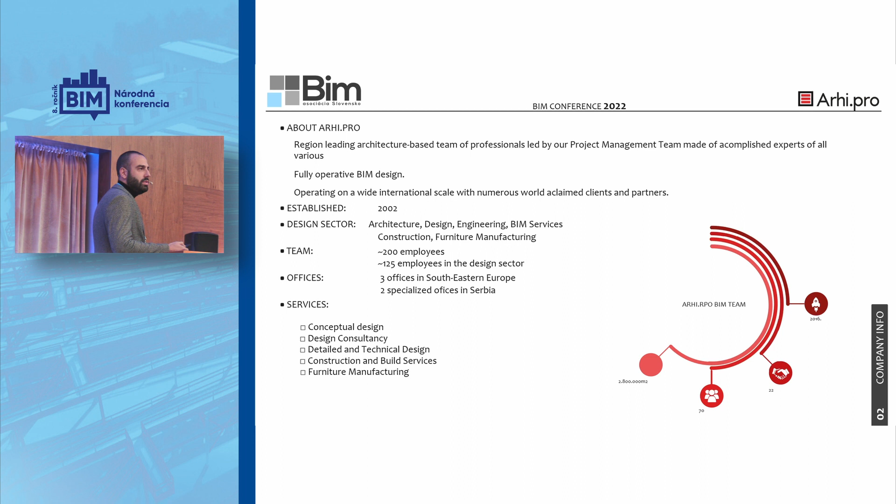Our BIM story started in 2016 when the first words of our standard were written. What you can see on the screen is the content of our BIM standard, updated this year.

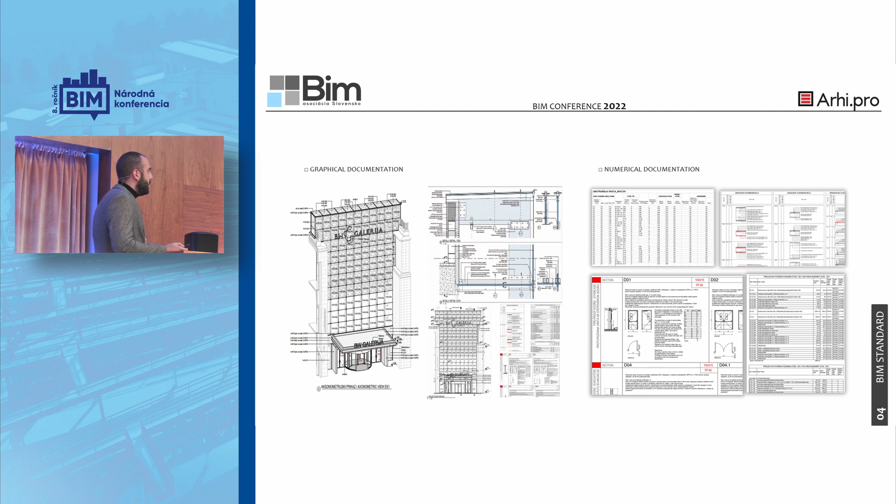In our standard we defined everything such as graphical documentation, numerical documentation, roles and responsibilities, naming conventions, BIM execution plan templates, and checklists from BIM models. So all elements such as view templates or door schemes, architectural physics are standardized, and there is no space for any kind of improvisation.

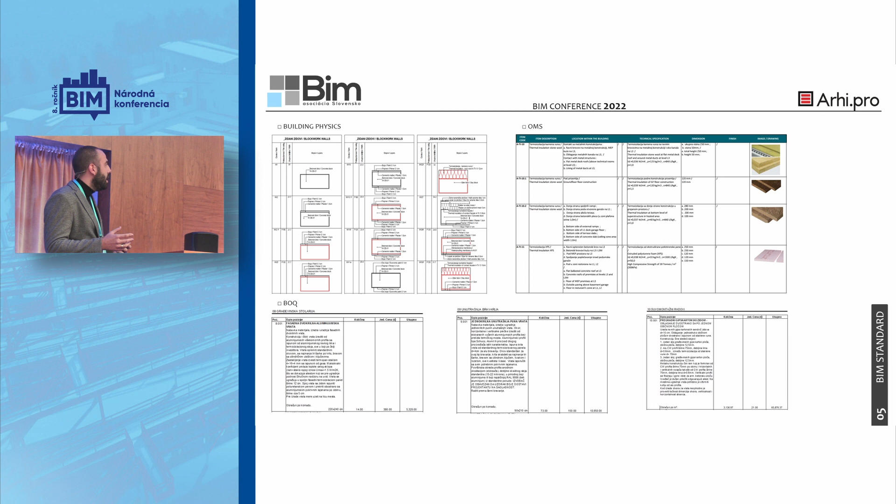But at one moment we recognized that we had some inconsistency in our documentation, such as in OMS documentation, building physics, or BOQ. We noticed that we had different codes for the same BIM elements or the same materials in OMS or building physics, and we concluded that we had to define one classification standard to have unique documentation.

We created our Arhi.pro classification standard in accordance with Uniformat and MasterFormat classification systems, and we defined 7 levels of Uniformat classification. It's a really complex standard, a huge book, and you will see why we did that.

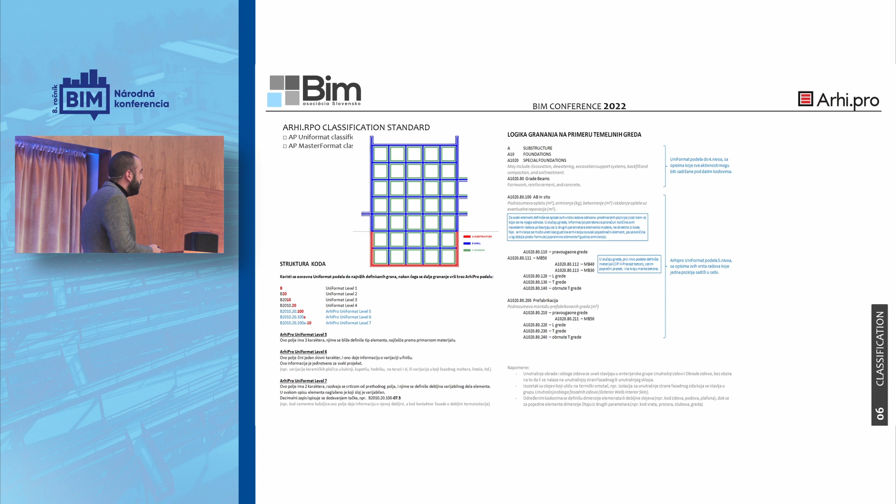The first benefit of the classification standard was the architectural specifications, because now we have the Uniformat code for elements such as partition wall, and all the layers in that element are MasterFormat codes. That Uniformat code you can find also in our graphical documentation, in our BOQ, and those MasterFormat codes you will find in our cost items in construction.

You can also find them in OMS if they are finishes. So we have a specification structure in the way that we want.

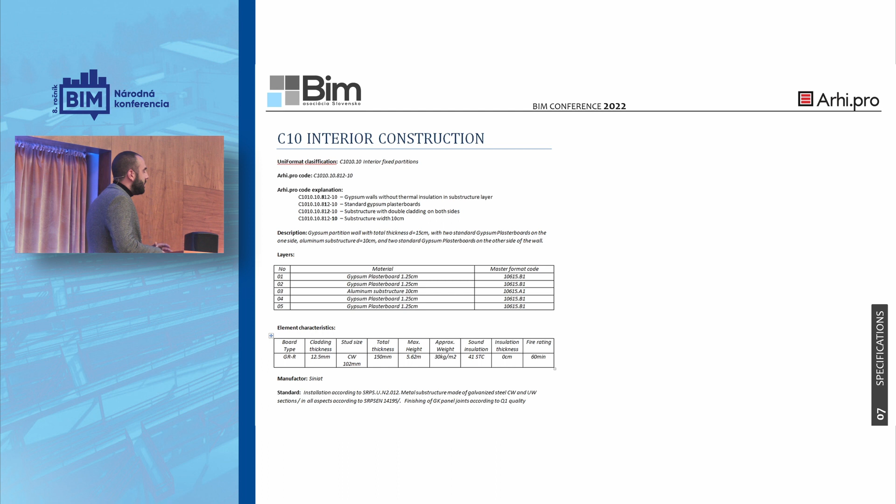And then we, as contractors in our construction sector, recognized the opportunity to implement that classification system in 4D and 5D technology.

This classification system allows us to define our Arhi.pro cost base. This is an Excel table where all elements are Uniformat coded, and for each element we have defined several cost items.

In some cases these cost items are construction steps of that element, but in other cases they are the layers of the element. For example, for a beam we have cost items like formwork, concreting, reinforcement, and removing formwork. But for a floor, the cost items might be cement screed, glue, tile, and so on.

We define the unit for those cost items, the formulas for how to calculate them from our BIM model, and what is very important, the element query for that element.

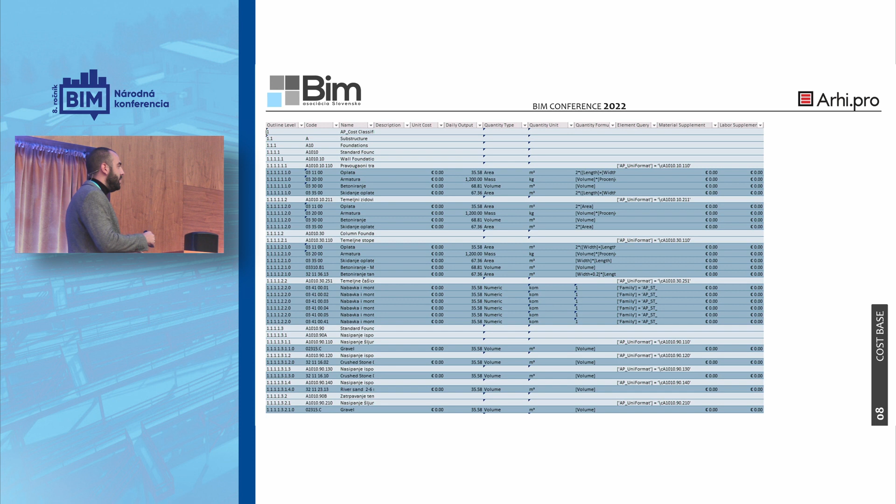Element query means it helps us find that element and assign it in our BIM model. As you can see, our element queries are really simple: UniFormat equals code, UniFormat equals code. That's why we developed such a complex 7-level Uniformat classification, because we wanted to cover all variations in our model. It is very easy to assign those elements and connect them with those cost items.

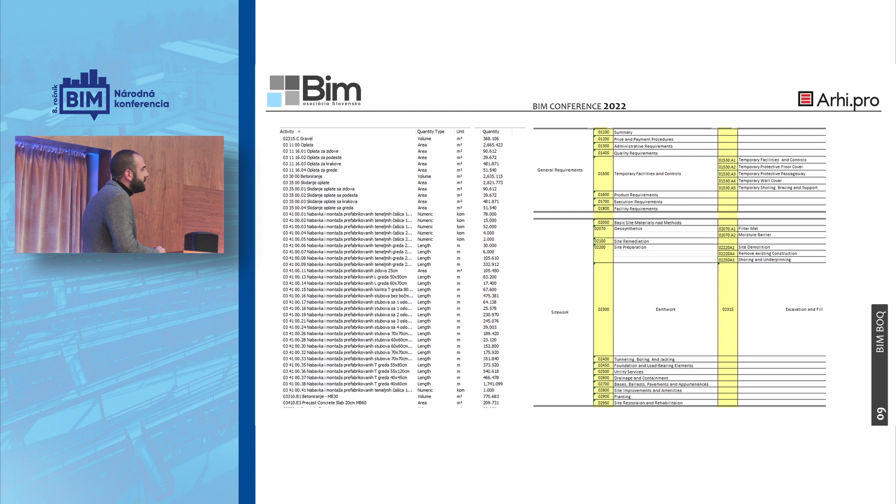The biggest concern of our engineers in the construction sector was the form of BOQ. They said, we don't want BOQ structured by uniformat, we don't know what that is. And the solution was the BOQ structured by cost items, by the master format system. That is also the similar form they use to work in Serbia. So we have concreting works, aluminum works, and earthworks, and they were satisfied with that.

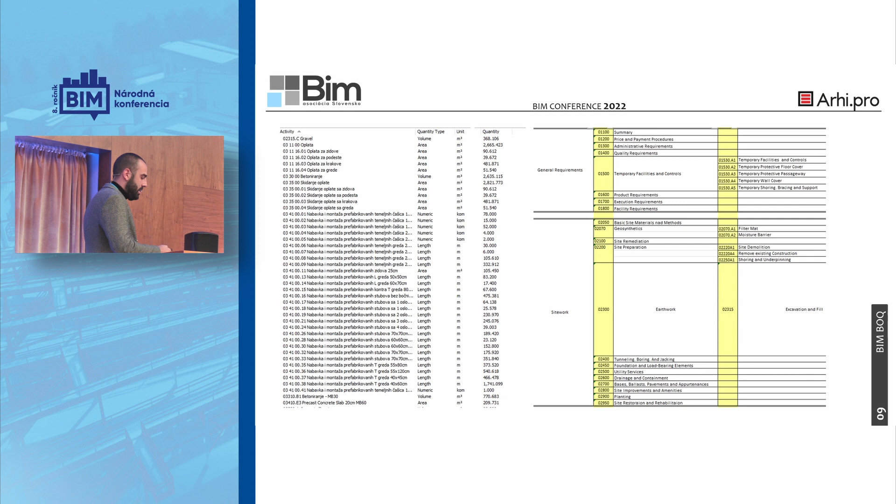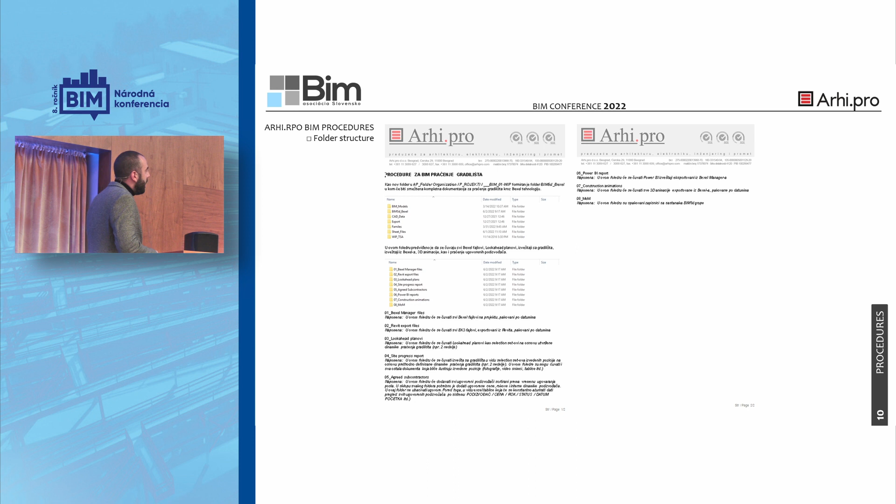The last step for the implementation and for our pilot project was creating procedures for 4D and 5D analysis. We developed procedures for everything: folder structure, where we want to keep those files, how we want to collaborate. Also, this is an example of our procedure for creating look-ahead plans. When we finished planning, we used Bexel technology, Bexel Manager software. We create look-ahead plans in the form of a selection set for each week, and in this procedure it's really clear how our BIM coordinators on site could open that selection set, uncheck elements that are not constructed, check elements that are constructed, and save that selection set as actual for that week, so we can include it in the progress.

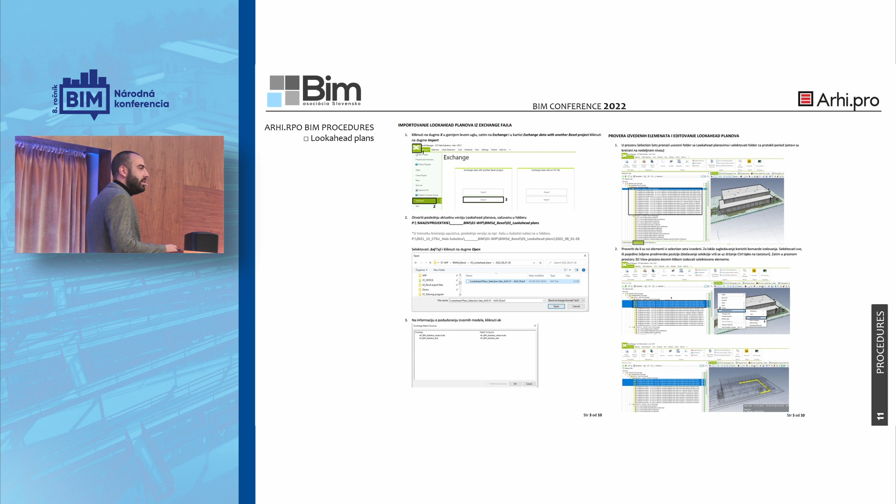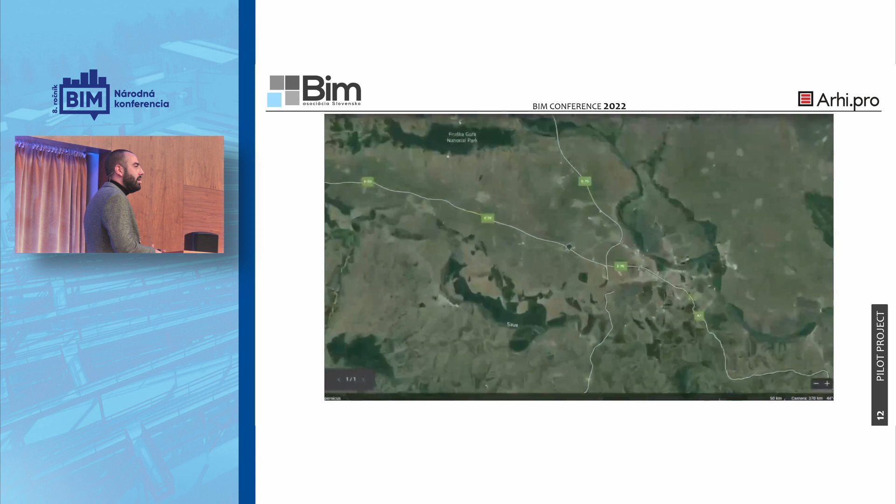Yes, that's our pilot project. It's an industrial hall in Serbia. Why did we decide on an industrial hall? Because it's not such a complex building and there aren't so many BIM elements, and we wanted to check our standard and our cost items on this project.

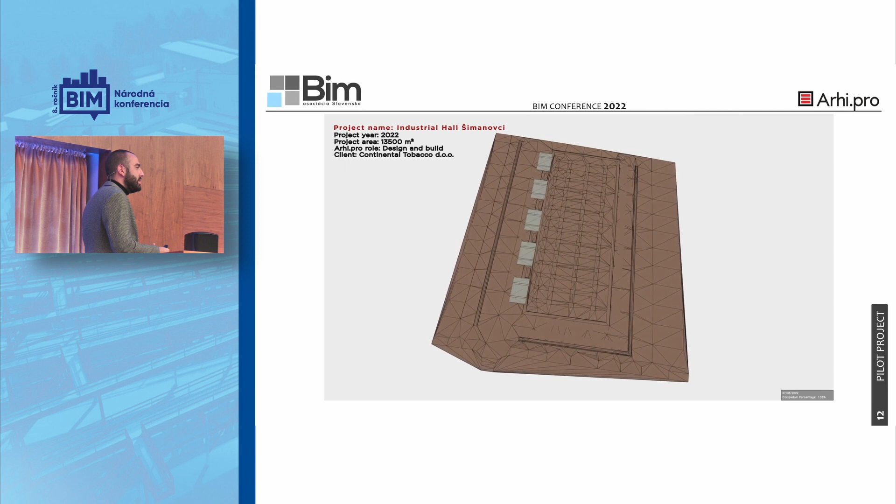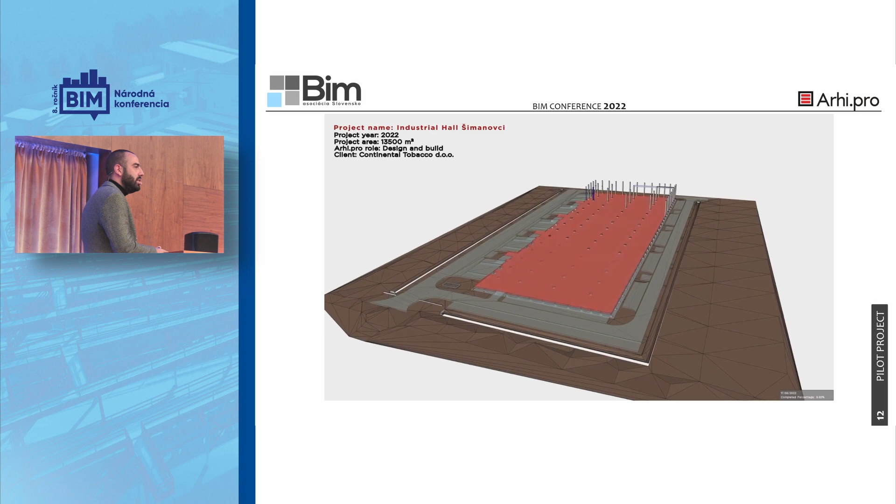So what's important to say is we wanted to go step by step. We didn't want to do everything on this project. We wanted to do planning, we wanted to include cost, but we didn't want to include labor cost or material cost. We put only the total cost of each cost item per unit.

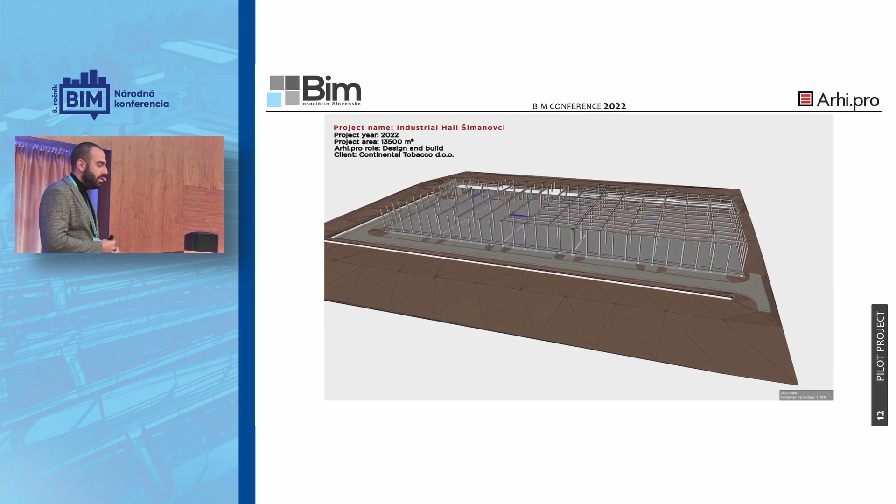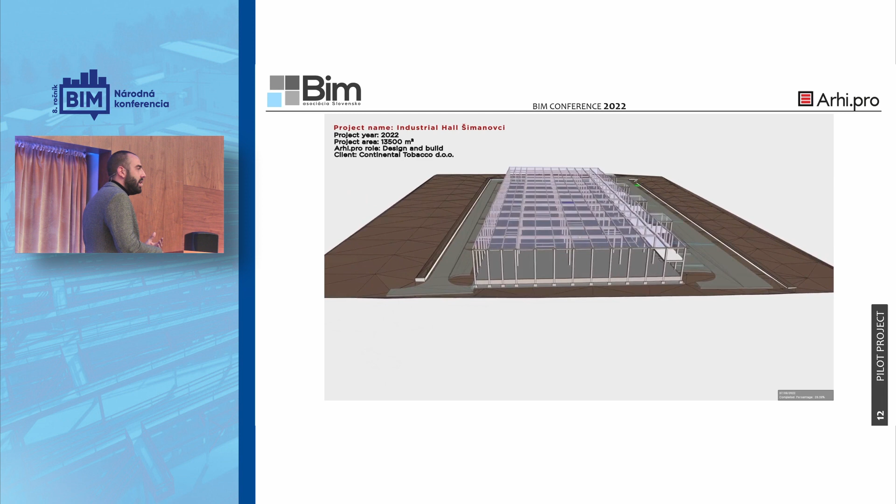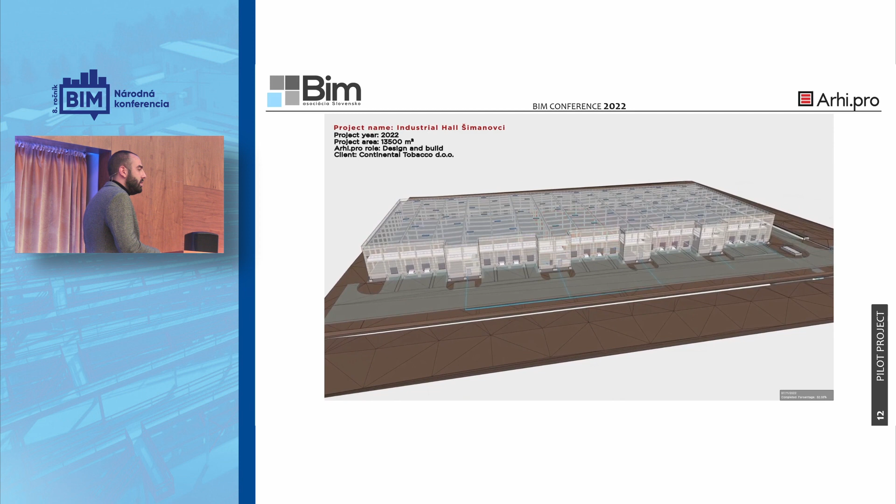The first benefit was the visualization of the construction site, which was very useful because we noticed some mistakes in the construction phase and could react on time. Some elements were wrongly coded, and now we are tracking all the situations with our subcontractors. We are tracking all the quantities. We have a really clear picture of what they are doing, what the price is, and our site coordinators are also using this technology to check that.

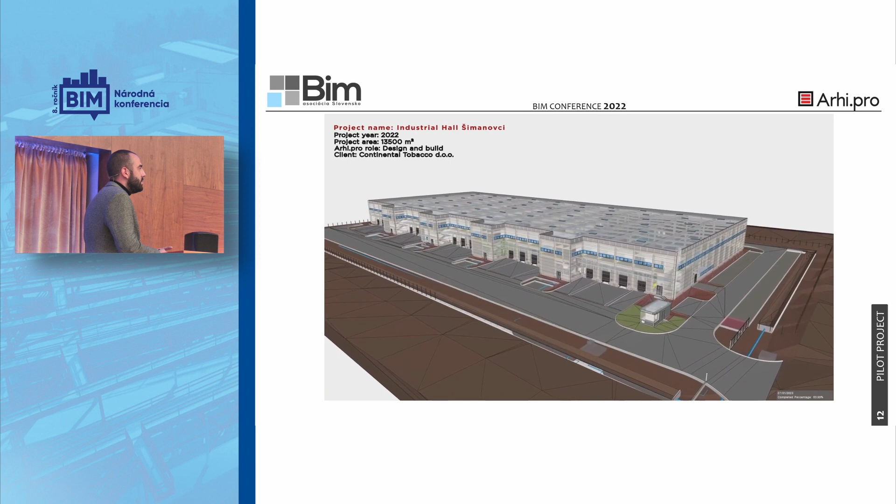This hall is now in the construction phase, and what's important to say is that there were no BIM requirements from the client on this project. We recognized the benefits for us as designers and as contractors to do this.

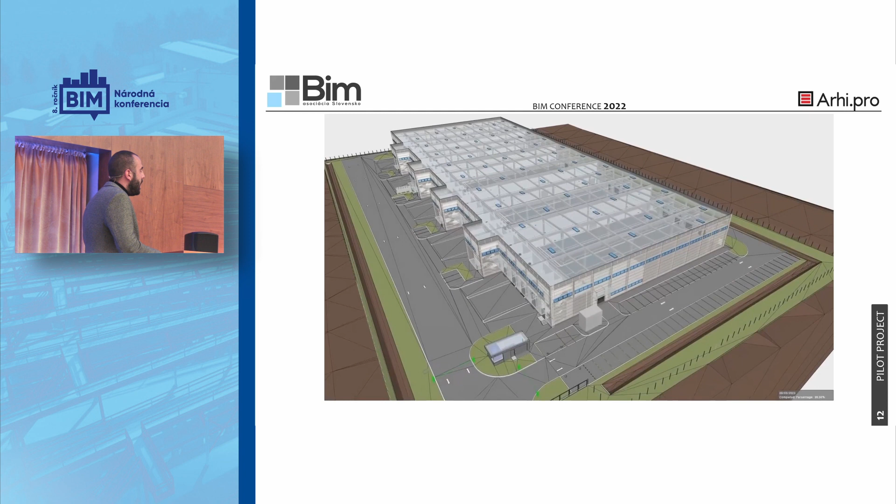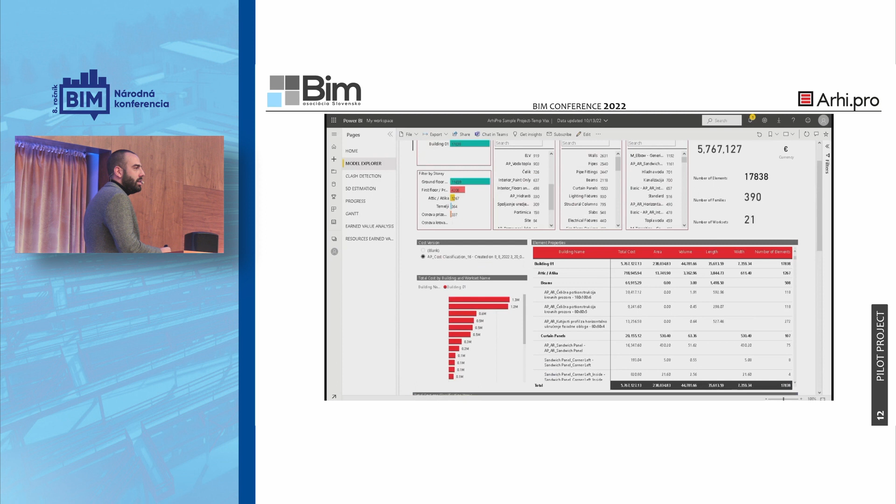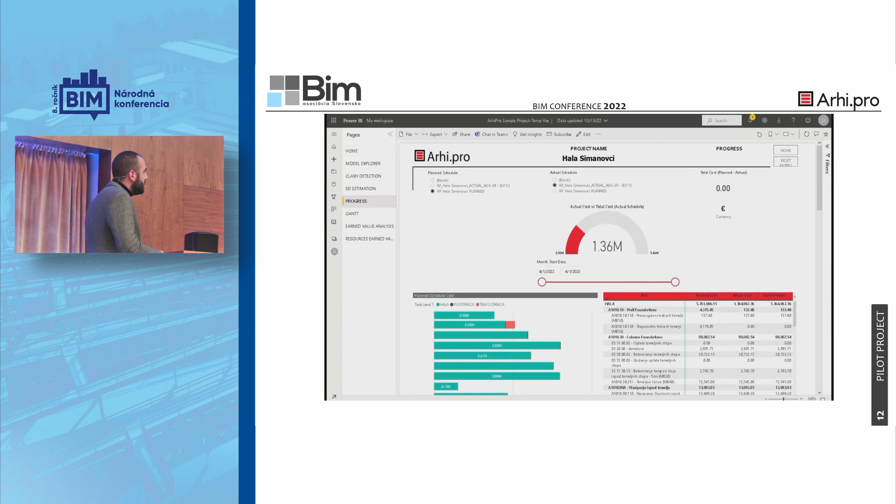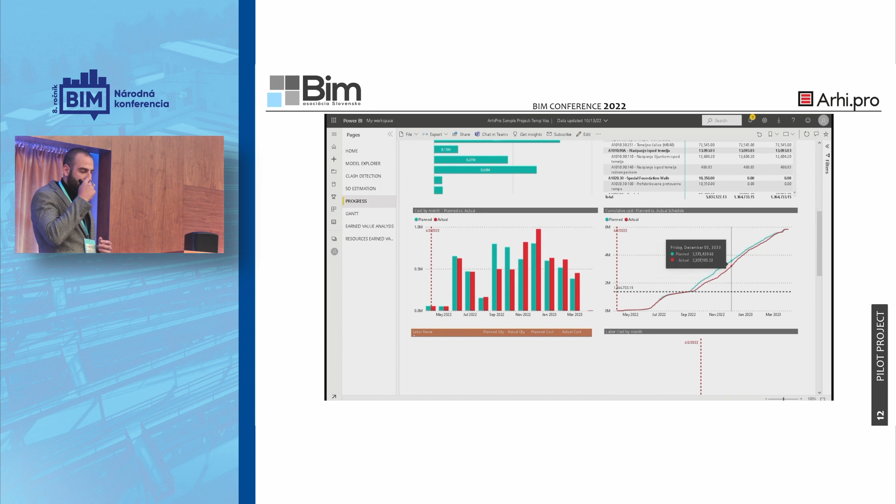Also, we will now see some form of Power BI reports. We can check all the quantities regarding subcontractors, work sets, or families. We can check all the costs regarding those items, and also the progress. We can track the planned situation versus the actual situation. We are not only tracking the time of constructed elements, we are also tracking the new prices, and we have a really clear picture of what we plan to do versus what we are actually doing.

But it's really important to say that for the next project we are planning to include labor cost, material cost, and procurement also, but it's very important to go step by step with BIM.

Also, an important thing I want to say is that BIM is not a tool. BIM is how we are working on something, it's a way of thinking, and I think BIM is some kind of digital collaboration.

But there is no BIM without standardization and defined protocols. I think we don't need to wait for our authorities, or even more, wait for our clients to define BIM guidelines and BIM requirements. I think the biggest design and construction companies have to be the main force of BIM application and standardization. Then we have to share our knowledge and experience, and I think that's the only way. That's our story.